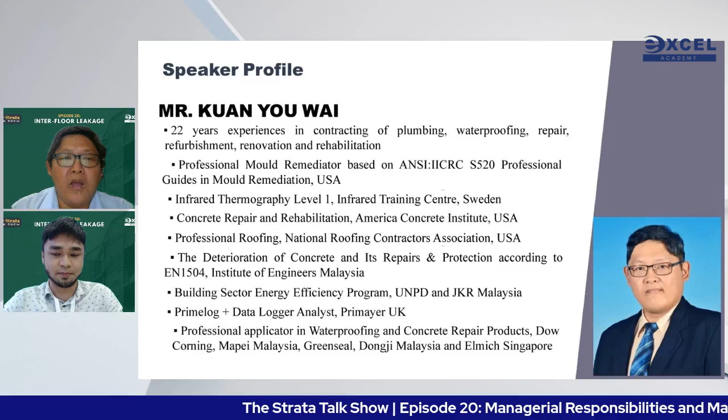Originally I'm a contractor who repairs buildings, and most of the time I repair leakages. So over the years, I have accumulated sufficient knowledge and experience, doing it hands-on as well as at a campus level in my postgrad study. So along the way, I have acquired a number of credentials, and now I have also become a speaker on interfloor leakage for the tribunal and the Commissioner of Buildings. Next page.

Next, please. So when it comes to interfloor leakage, there are three laws related to interfloor leakage, namely the Housing Development (Control and Licensing) Act, the Strata Management Act, as well as the Strata Management Regulations. So next page, please.

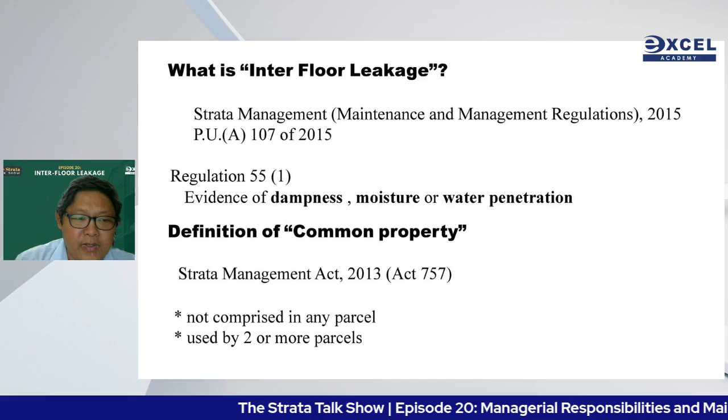Okay, when we talk about interfloor leakage, according to the Strata Management Act, it is evidence of dampness, moisture, and water penetration. But of course, the first thing that we have to consider is who pays in which type of situation. As a result, the definition of common property is very important. Common property, according to the Strata Management Act, is not inside the parcel and used by more than one parcel. But in reality, there are some areas where it clashes, so I will show you later on. Next slide, please.

Okay, this is the Strata Management Act SOP when it comes to interfloor leakage, which I have summarized in one chart. This chart is very useful because I have also highlighted the relevant sections. So in order to understand this chart, perhaps you need to print it out later and look into it in a clearer way. Firstly, upon receipt of a complaint, in 7 days or as far as practicable, the property manager needs to go down and do an inspection. During the inspection, there are 4 things that need to be considered.

Firstly, is the building element shared by more than one unit? Secondly, is it in the parcel or not inside the parcel? Thirdly, did it actually happen during the defect liability period? If it happened during the defect liability period, then the case will eventually be referred to the developer. That's how the Housing Development Act comes into this.

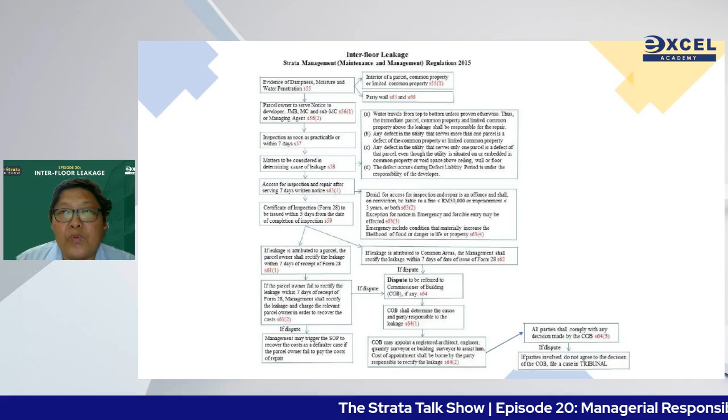Subsequently, upon inspection, if there is a need to access the upper unit or the neighboring unit, then the property manager needs to serve a 7 days notice so that he can have access. After the notice, the house owner needs to give access, failing which they will be subject to a penalty of a fine of not more than 50,000, or 3 years imprisonment. So far, the law has not been implemented for this part because it is putting people into jail for a small issue of leakages. And then if there is any further dispute, one can refer to the COB.

And in the event that the parcel owner for some reason cannot afford to do it, or has a lot of other reasons, the management will have to take up the repair work and charge it back to the account of the particular parcel.

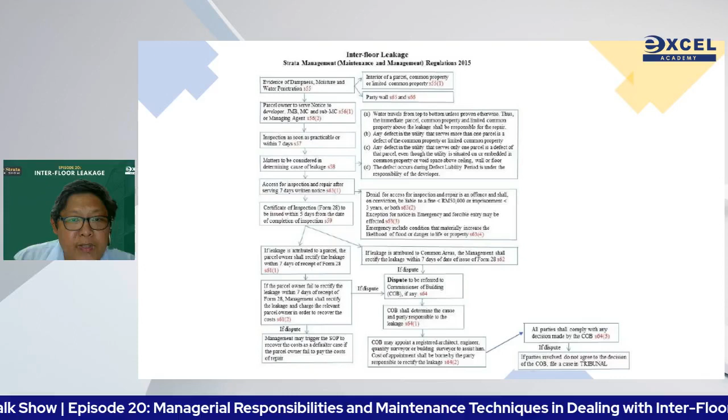Okay, so if there is still a dispute, when the COB intervenes, the COB can appoint a surveyor, architect, or engineer to carry out the inspection, and the fee involved will be borne by the party who is responsible to rectify the defect. So after all the inspection, in 5 days, the building manager needs to issue Form 28. Form 28 will state who is the party responsible for the repair, as well as the reason.

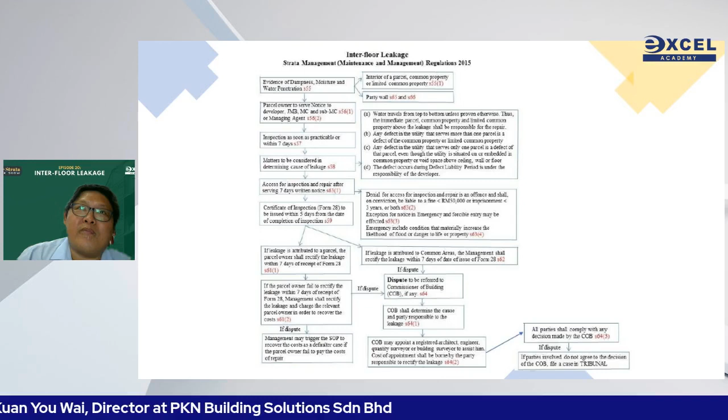But I always advise property managers, if you don't have any knowledge and tools in leak detection, try to write a general description, because there were some incidents whereby COB called me up and asked, "Hey, Kuan, some property manager filled in the form wrongly, and people have worked on it. So what happened next?" So my answer is, well, property managers have to take responsibility for their own words.

So try to put a general description. If you see slab leaking, just write slab leaking. If you see pipe leaking, just write pipe leaking. So don't go to waterproofing leaking or whichever part of the building, okay? So next slide, please.

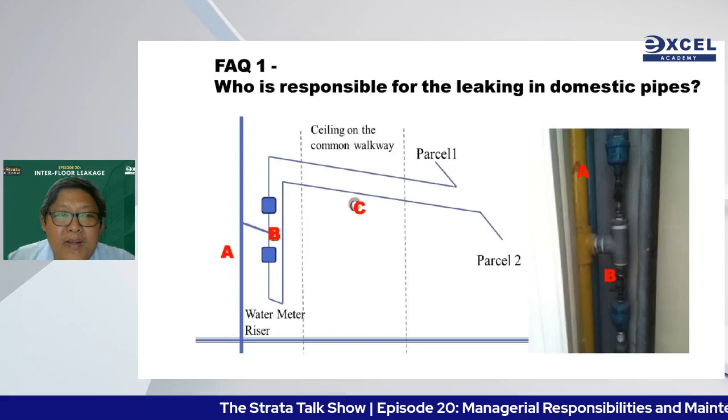And let's say C is a pipe that travels along the walkway before it enters the parcel. Let's say C leaks. C is in the common area but not shared. Bear in mind the dominating factor when we consider who pays is shared or not shared. It's not the location alone. I have encountered property managers that say, "Hey, common area, management pay." No, in fact, common area, if it's not shared, the parcel owner pays. Next slide, please.

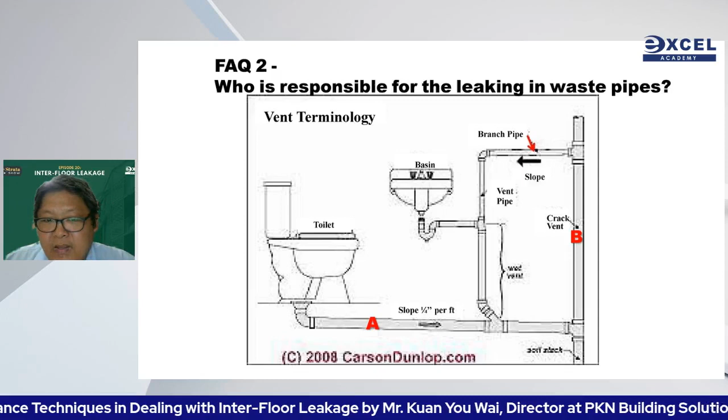Okay, this is a toilet inside the parcel. When A, the horizontal pipe, leaks, is it shared? No, it's not shared. But B, is it shared? Bear in mind, the pipe shaft, or the box-up in layman's terms, actually has many common pipes which are shared but inside the parcel. So what I want to tell you is, when it is shared, although it's inside the parcel, the management need to pay for the repair. So there is the confusion that is quite common in the industry. Okay, next slide, please.

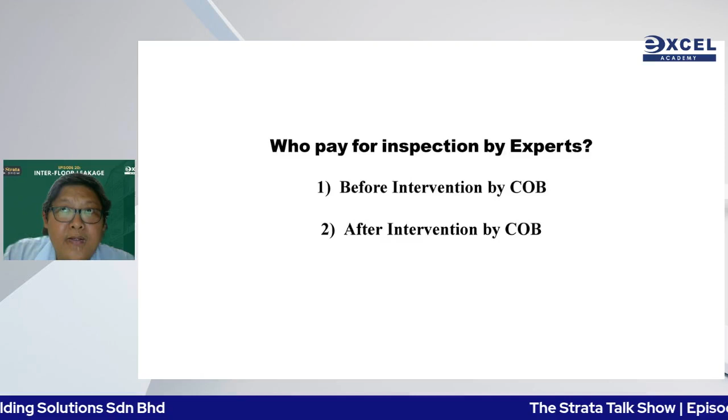According to Section 59(2)(d), any expenses incurred in the rectification of the parcel, the management have the right to recover the cost by charging to the respective account. As such, bear in mind, inspection is part of rectification. So the property manager can adopt this clause when it comes to paying the expert.

Because if you don't take the initiative to pay the expert, hoping that eventually the respective house owner will pay, for people like me who do leak detection, if my report does not favor the person who pays me, in most cases they will not pay. They decline to pay. If the property manager doesn't take the initiative to pay me, I will not be interested to do the job. So this is how it goes. Next page, please.

Okay, when there is an emergency, according to the Strata Management Act, it is something that happened that can endanger the safety of the residents and the building. Forcible entry is allowed, but I have joined some of the forcible entry exercises in the Ampang area. Bear in mind, if the case is not very urgent, you can actually request the COB to bring in police from KBKT to escort you in.

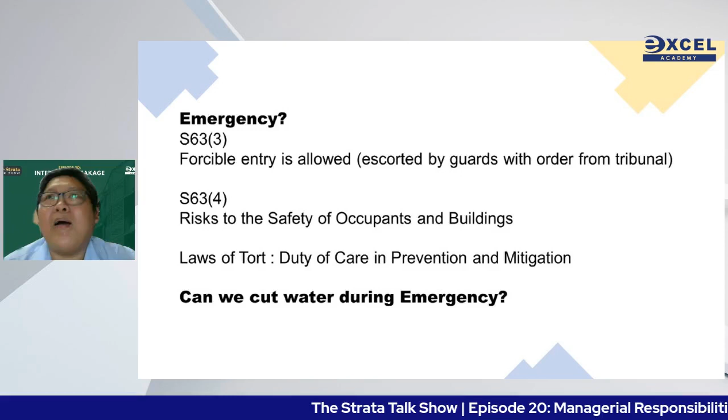If, let's say, the situation is so urgent that forcible entry is inevitable, I would always urge you to bring along your committee, your guard, your neighbor to witness the operation, so that there is no allegation later on. And then of course,

when it comes to law of torts, even though you are a neighbor, not to say if you are a manager, when you see dripping water, you actually have a duty to put a bucket under it to mitigate the damage of the leaking. And then, in the event that if I cut the water it can stop. Can I cut the water?

From a basic human rights point of view, you should not cut water. But if you need to cut water, please supply a temporary water supply so that people affected will still have access to the basic human need, which is water. So next slide, please.

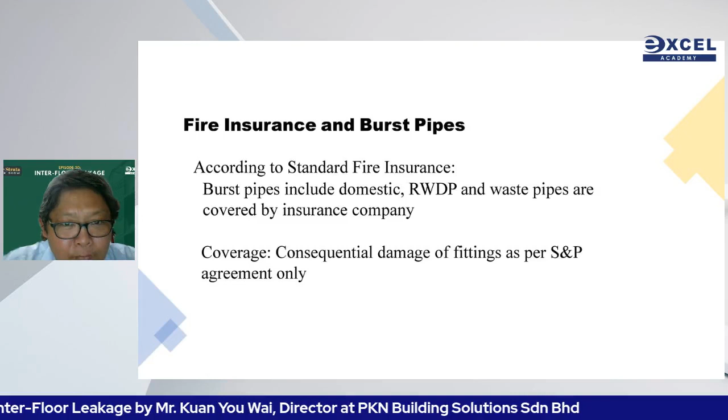In the event of a pipe burst, fire insurance in general has coverage for the damage caused by the burst pipe, be it a burst domestic pipe or burst sewerage pipe or whatever burst pipe. So long as it is a burst pipe, I understand it is covered in the fire insurance. But I will urge you to look into the insurance policy and clarify it. Next slide, please.

Okay, is interfloor leakage a concern? For your information, water is the factor that causes germs to multiply at an accelerated rate. So when there is excessive dampness, your kuman, your kulat, your virus, all will be growing in a very speedy way.

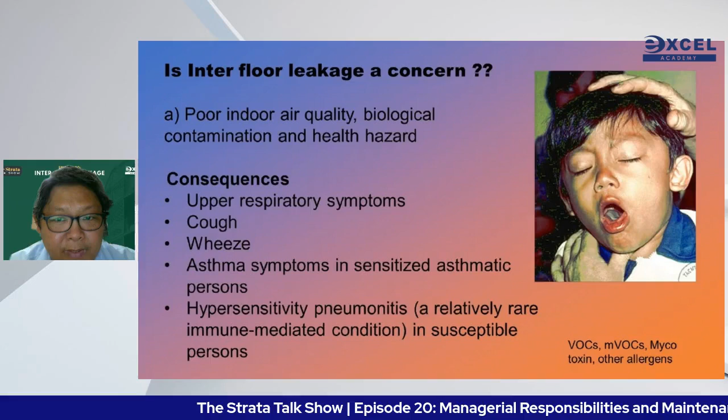As adults, we have some level of immune system, but children, the pregnant, the old, and the sick have less immune system. So as a result, any excessive dampness, even without visible mold, is unhygienic to people with compromised immune systems. So next page, please. Next slide, please. So this is mold.

Mold actually is a microscopic plant. It has roots, it has a trunk, it has seeds, and water is the variable condition that can cause it to grow. Oxygen, nutrients, and temperature are readily available. We cannot control them. Only water we can control. Next slide, please.

Okay, why, during the leaking situation at the damp spot, do we only see the circular, sometimes colorful, most of the time black, circular stain that looks like it's growing in time? So why do we see mold and not bacteria? In fact they come together, okay?

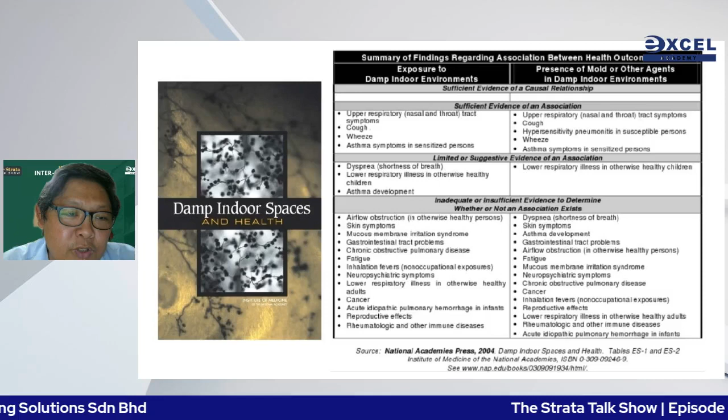It's simply because bacteria and viruses are much smaller. Even dust mites are much smaller than the mold. That's why we see mold, but in fact they come together in a battalion of biological contaminants. Next slide, please. So this is a report from the Institute of Medicine USA to tell you scientifically that yes, mold is hazardous. It's a health hazard. Next slide, please.

And besides mold, of course, building excessive dampness can cause a lot of damage to the building. Materials like timber, like cement, like concrete will expand when wet. And other materials, like steel, like other metals, will start to rust. And when it rusts, it will also expand and start to lose the structural integrity of the particular metal. Okay. So next slide, please.

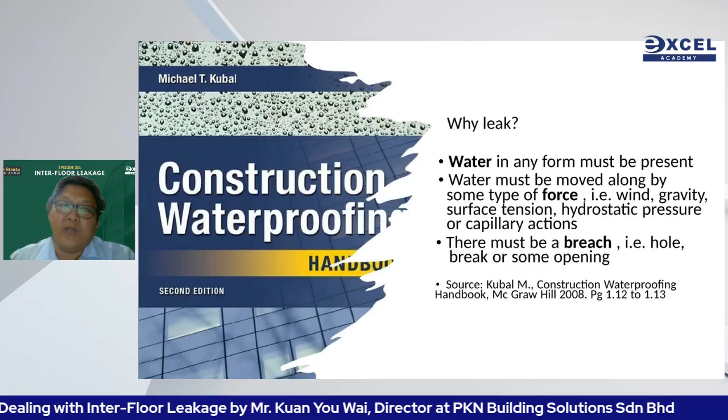Why is there leakage? According to this kitab semua bocor, the so-called kitab semua bocor, the construction waterproofing handbook, why is there a leak? There must be water, there must be a force, and there must be a cavity or breach to allow the water to go through. Next slide, please. This is very true for liquid water ingress.

For condensation, we need to understand condensation from the building science point of view of airflow, heat flow, and moisture flow. These are all basic elements or basic principles of physics, which are applicable when it comes to analysis of condensation. Next slide.

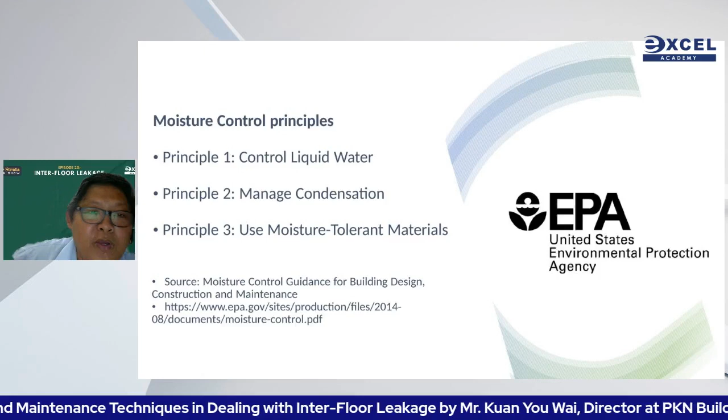The Environmental Protection Agency also has their moisture control principles. So control liquid water, control condensation, and in areas prone to dampness, do not use materials like timber, like fabric, like carpet. In these types of material, mold can start to grow easily or they start to dilapidate easily. Next slide, please.

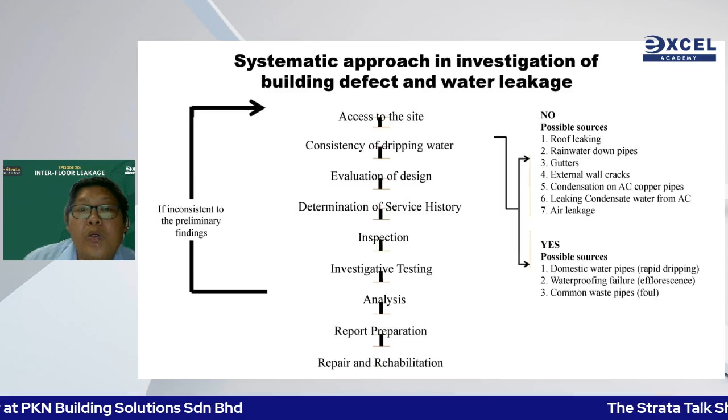For leaking that is continuous, then there could most likely be domestic water pipe leaking or waterproofing failure or waste pipe. It depends on the smell as well. And then we need to interview the parcel owner. We need to check with the service crew or the technician, and then we do inspection, and if possible, we do some investigative testing to have a more holistic and accurate understanding of the cause of leaking. Then we need to do the report and the rectification. Next slide, please.

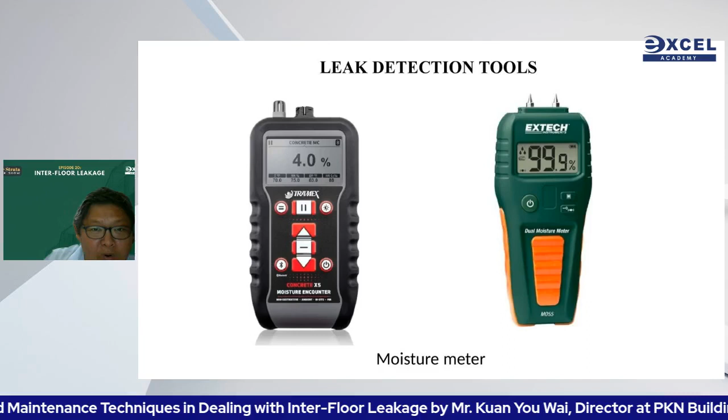So this is some of the equipment that we use to detect moisture, something like a moisture meter. For this moisture meter, there are two major types. The first type uses ultrasound. The second type uses an anode and cathode. Look at the pin of the moisture meter. One side is anode, one side is cathode. So when you put the pin onto the surface, if there is any water, then electricity will be conducted. That's how we measure water with electricity. If there is any water, more electricity is conducted. So it all comes to the principle of resistance as well as electric flow. Next slide, please.

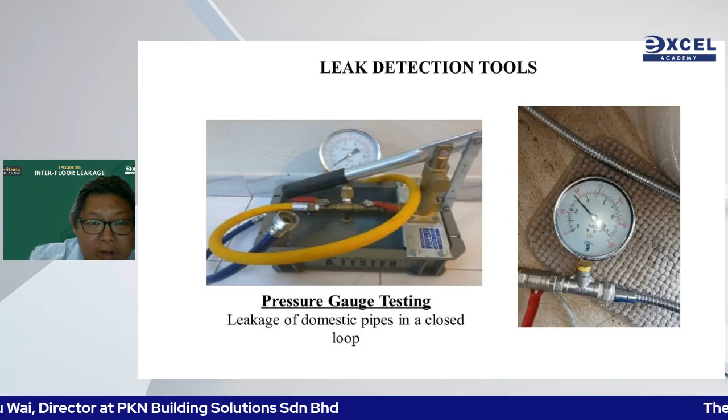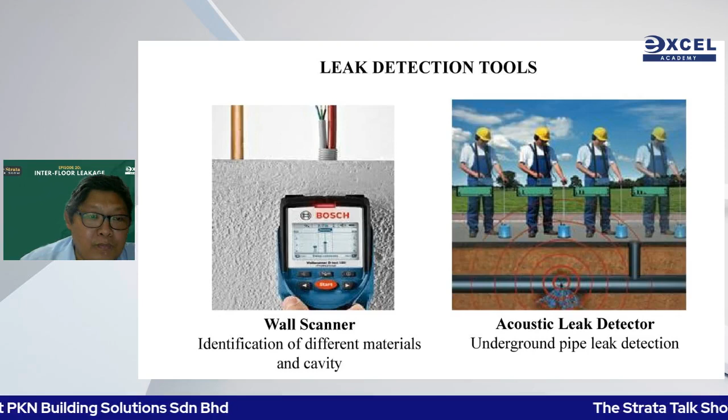Wall scanner is an ultrasound equipment that can tell me what is inside the wall or concrete. It can be plastic, it can be wood, it can be metal, ferrous metal, non-ferrous metal. So it's quite useful. And let's say for underground, how do you detect underground? Doctors use a stethoscope. We also use a stethoscope, but our stethoscope is as big as my head. So we can listen to the ground up to 10 feet deep using the stethoscope. I will show you more diagrams later on. Next slide, please.

So just now we talked about moisture meters. What if we have a very big moisture meter with very big pins? Bear in mind, most of our waterproofing materials are insulated. They don't conduct electricity. So if we spray water on our waterproofing area, and we use these two probes to touch the waterproofing and walk along, if there is any earthing, there will be a beep sound, and you can be alerted that the cavity is actually there. That is for the low voltage electronic leak detector. For the high voltage one, you can see the spark jumping into the cavities. This is how leak detection technology works in developed countries. So far as I know, this technology hasn't reached Malaysia, but I also don't encourage having it because it's too expensive. Next slide, please.

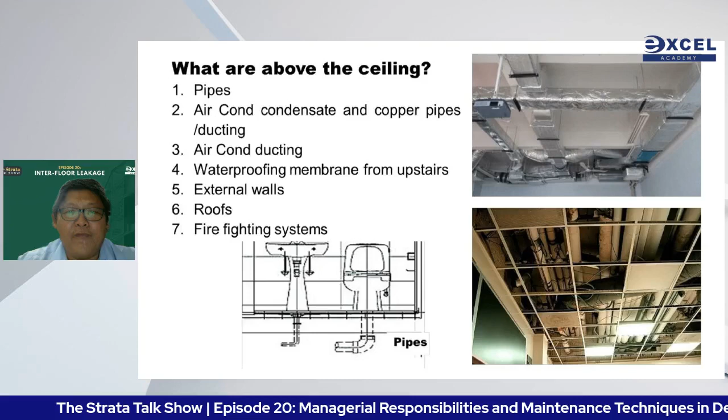Okay, when you open the ceiling, you'll be having a nightmare. There are so many possible water sources, be it pipe, be it aircon, be it waterproofing, external wall, roof, even firefighting pipes contain a lot of water. Next slide, please.

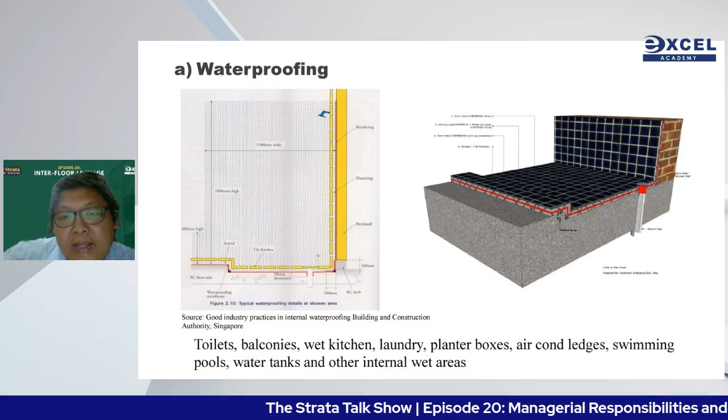So next slide, please. When there is leakage, how do we know, how can we confirm it? Firstly, this is an actual site of mine in a balcony. So I block the balcony with newspaper covered by the black garbage plastic bag, and I measure the moisture level at the lower floor with water stain before the flood test.

According to ASTM D5957, the flood test needs to be conducted for a minimum of 24 hours with less than 4 inches of water, and regular monitoring is required. Why is regular monitoring required? Let me share my experience with you. There was an incident whereby my flood test was too successful, and the water soaked into the plaster ceiling. The whole toilet plaster ceiling collapsed, causing more damage.

In another case, the water went into the DB box downstairs. Luckily, no electrocution. Otherwise, I will not be speaking here. You will not know me. So these are all the risks, inherent risks of conducting flood tests, which you need to be aware of.

So when you do flood tests, if you cannot be there, make sure the house owners are there and tell them, if the water recedes, please help me to fill in water. If you can see a lot of water coming down, can you quickly call me up and I can come here to verify. If there is an obvious increase in dampness using the moisture meter, you can stop the flood test. You do not need to wait till the secondary damage arrives. Next slide, please.

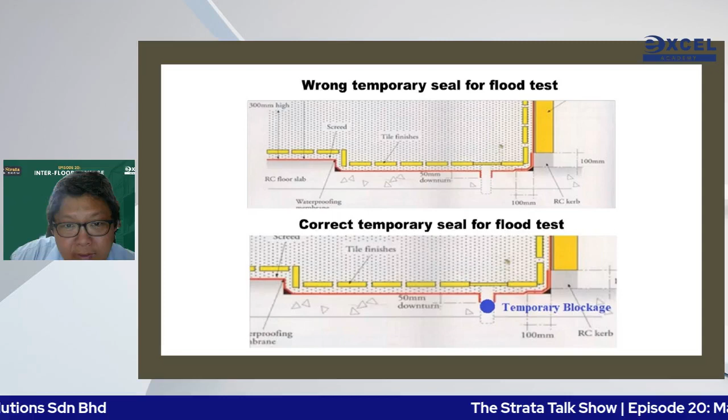Next slide, please. So this is how we seal the floor trap for the purpose of flood testing. You see a number of people use transparency to cover the floor trap. Usually this is not correct, because if you look at the diagram, we should actually block it inside the floor trap the way that I show. So next slide, please.

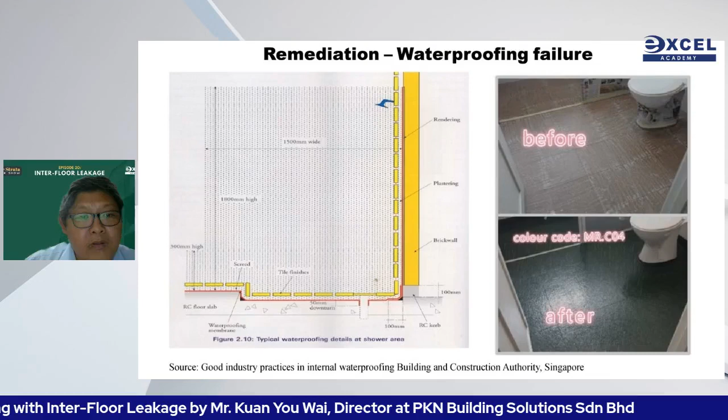There are some methods nowadays that apply epoxy coating on the toilet. It's quite a cost-effective manner, but it's not a durable one because good waterproofing should be elastic and chemical resistant. Epoxy lacks the elasticity, although it's very chemical resistant. Our building actually expands and moves. So when there is no elasticity, it cracks easily, then water will start to penetrate again. Next slide, please.

And PU grouting is very debatable, right? Everyone knows that it's no good, but everyone is doing it simply because it's the cheapest way. Being an infrared inspector, I use infrared to monitor PU grouting. And from the infrared point of view, the dampness actually spreads. So when it spreads until it reaches the next cavity, water starts to leak again. That's why waterproofing warranty carries 1 month to 3 months warranty only.

Simply because it's not a way to resolve the root cause. Unless you can prove that the crack is no longer moving, no longer dynamic, and the source has been rectified, then you should seal up the cavity with PU grouting. Next slide, please. Pipe. All types of pipe: waste pipe, domestic pipe, AWM pipe, common waste pipe, rainwater down pipe. Next slide.

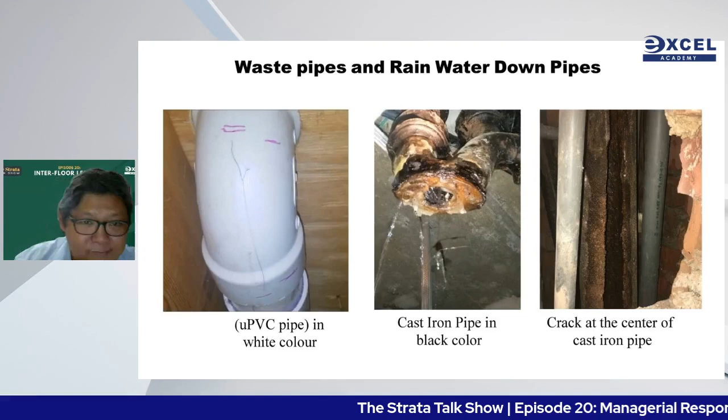Okay, so we talk about waste pipe for the time being. Waste pipe typically cracks, especially at the elbow due to impact. It's thinner as compared to the cast iron pipe next to it. But cast iron pipe, after its service lifespan, has a tendency to crack by itself due to corrosion. And the third photo is actually a vertical crack from top to bottom of a cast iron pipe.

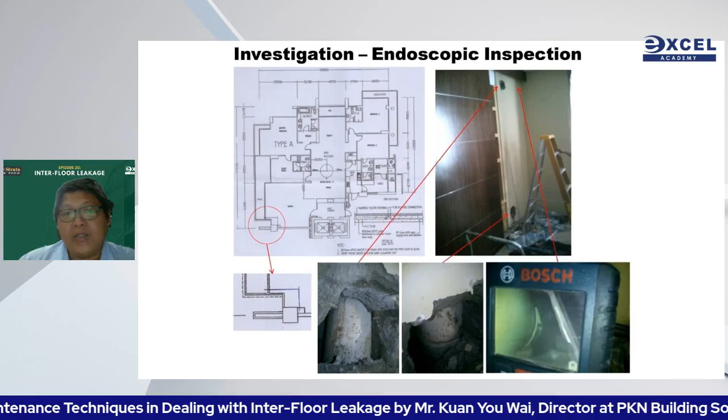And in one of the cases, I actually needed an endoscope to check it because the leaking is right behind the box up. So without an endoscope, I really cannot find it, or I will have much more difficulty to find it. This is a real life case that I attended back in the KLCC enclave area. Next slide.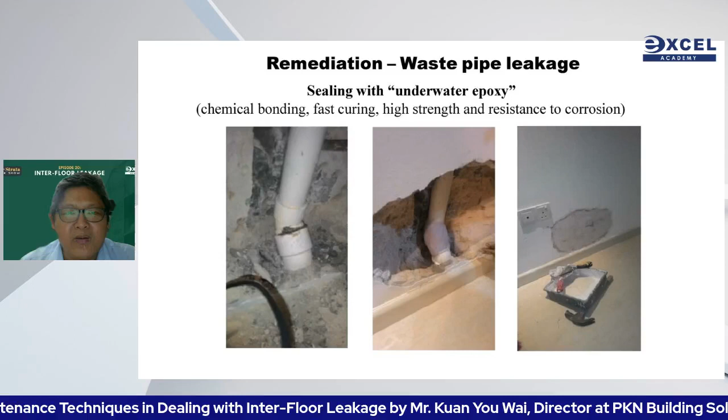And I discovered underwater epoxy comes in different grades. The very good grade really works perfectly, because epoxy etches into whatever surface it has contact with. It etches and it holds, and it becomes as hard as stone. So far, all these jobs have had no complaints until today. I've been in the industry for more than 22 years, and this really works. Okay, for cracked pipe that doesn't have pressure, this is quite a useful method. Next slide, please.

So when there is a blocked pipe, besides the rotan, these are the three ways that you can clear the blockage easily. One of them is the kinetic water ram that harnesses water and air pressure. We pump the air from this black handle at the back, beside the trigger. We keep on pumping air until the air pressure becomes very high, and once we trigger, it can travel into any shape and any distance. It goes so fast. The small pipe, horizontal, vertical, the floor trap, it doesn't reduce the pressure.

And secondly, high pressure water jetting. Look at this clearly. One point shoots to the front and three points shoot to the back. It actually moves into the pipe because three points shoot to the back diagonally. It doesn't damage the plastic pipe, and it will bring the hose into the drain by itself, because it pushes to the back.

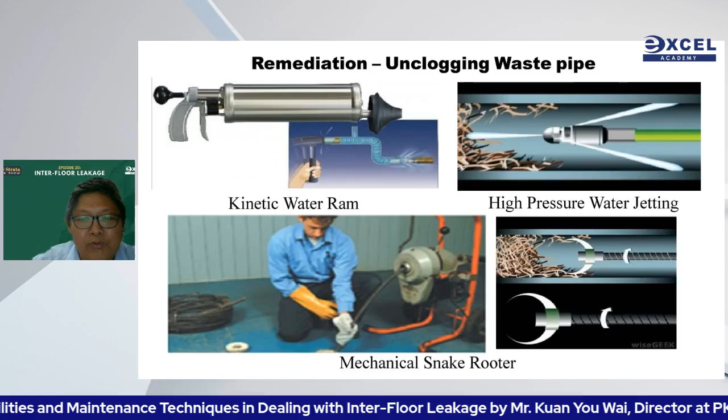And thirdly, the mechanical snake rooter. This type of motorized rotan, when you install different adapters or heads at the front, can break stone, and can clear leaves or roots. So it's also quite a powerful method to clear pipes easily. Next slide, please.

Another situation in our pump room: without leaking, there's extensive corrosion, and soon pitting corrosion will happen and it will start to leak. This is simply because of poor ventilation and the dense, thick chlorine gas. Look at this stainless steel tank. A stainless steel tank without paint is the first place water will condense at night. So when water encounters chlorine gas, it becomes hydrochloric acid and starts to damage metal and concrete. Bear in mind, hydrochloric acid can even corrode gold.

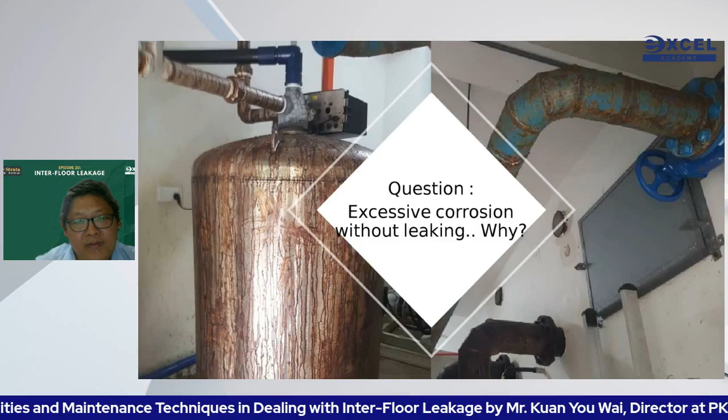So this is something one needs to be aware of when you install stainless steel pipes or fittings into the tank or pump room, because chlorine gas is not only hazardous to humans, but also hazardous to metal. Okay, next slide, please. Next slide, please. Okay, PVC pipe, domestic pipe, burst. Why did it burst? Next slide.

Okay, Suruhanjaya Perkhidmatan Air Negara has a recommendation. Residential units, high-rise residential units, should have water pressure above 10 meter head and less than 30 meter head. If the pressure is too high, a pressure reducing valve should be employed. This is extracted from the Uniform Technical Guide of Water Reticulation and Plumbing, published by SPAN, which you can download from the internet. If not mistaken, this is page 59.

So what I want to show you is the pressure reducing valve. It should be serviced in due time, twice a year as recommended by some manufacturers, three times by others. So check with your manufacturer how often it should be serviced. If you don't service it, the mechanism inside will go haywire. Sometimes the water pressure can become very high, sometimes it can drop drastically. The diaphragm of the pressure reducing valve needs to be replaced every 4 to 5 years, subject to the respective manufacturer. Next slide, please.

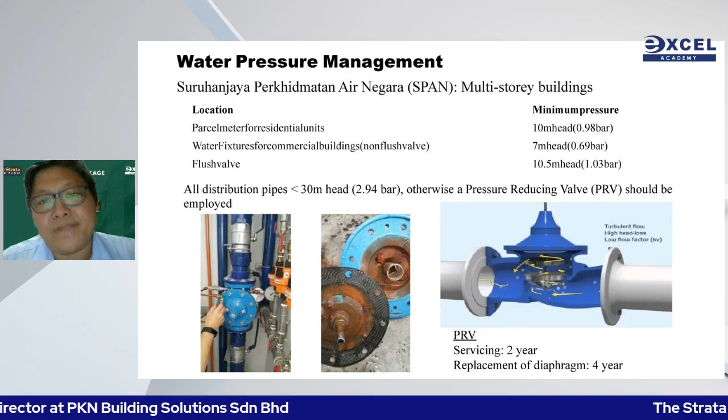And the industry has been practicing wrongly, because they like to set the pressure reducing valve to 2 bar. So bear in mind, every drop of each story, there will be an increase of water pressure by 0.3 bar. That's why in the first 3 highest floors, where the water pressure is not enough, we need a pump. Okay, after the first 3 floors, then you go by gravity.

And you can see 10 meter head is 0.98 bar, 30 meter head is 2.94 bar. So we put it to the closest decimal. 1.2 bar is safe, 2.7 bar is also safe. Okay, but if you set it at 2 bar at the 5th floor, the ground floor will suffer from high water pressure.

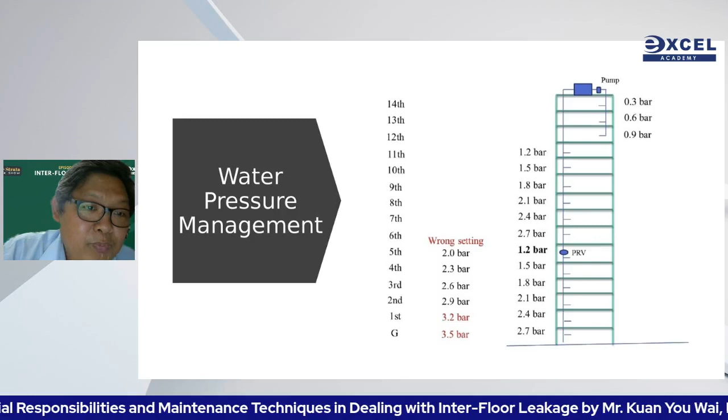I would like to share with you there was a year in 2019 where all the presidents and I, as a president, came to a conclusion unanimously to say that in the event someone goes into the unit and discovers the water pressure is more than 3 bar, any burst pipe will be managed and maintained by management, if management doesn't supply water with safe water pressure and the pipe bursts.

And I want to share with you: water heaters, faucets, all other toiletry utilities are designed to work at 3 bar or less. Imagine if a water heater bursts, the water may go into the wires and it can cause electrocution as well. So this is not something that you should take lightly. Water pressure management. Next slide, please.

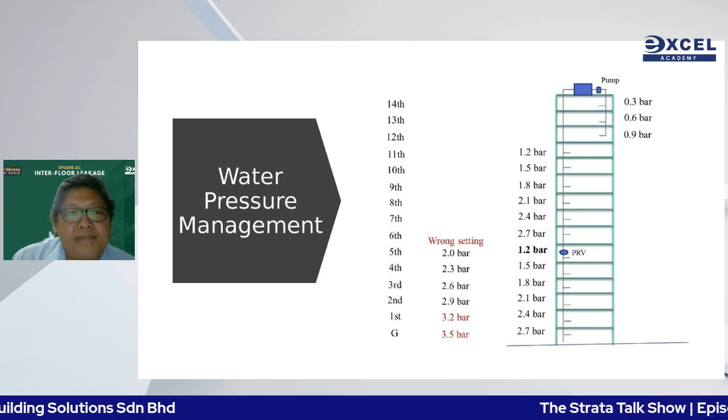And KPKT recommends cuci tangki setiap tahun, washing the tank every year. So can I know how many of you have had your water tank ever washed? If the water is so bad, it's detrimental to your PRV. Okay, so next slide, please.

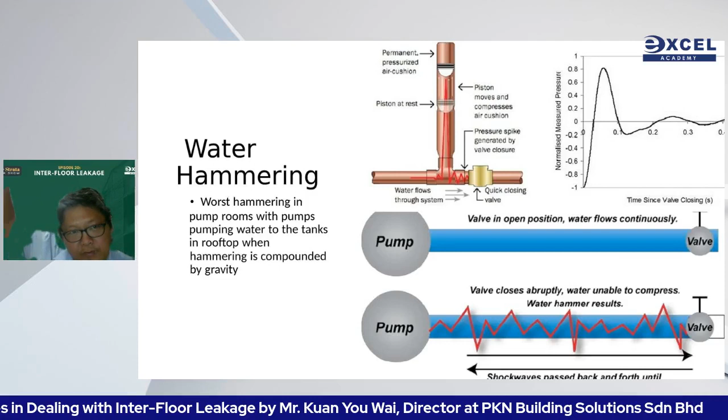So when you can hear water hammering sound, especially inside the pump room where from the ground floor you pump to the higher floor water tank. When the pump stops, water will push back due to gravity, it will bang the pipe and cause a lot of hammering. The hammering can be as heavy as 600 pounds, like a big hammer banging into your pipe, waiting for time to burst.

So when you have hammering, you do need a water hammer arrestor which has a layer of air, and when the pressure surges, the piston will move and the air will become an absorber to absorb the pressure surge. Okay, next slide, please. So, how do we check? Next slide, please.

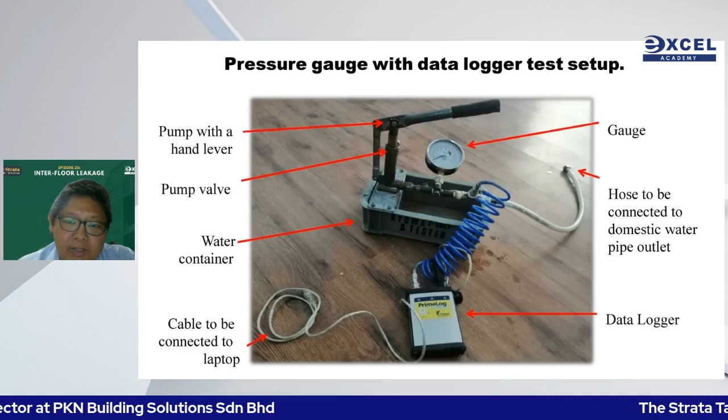This is the pressure gauge testing equipment that is meant for litigation purposes. We actually bring in a laptop, connect it to the data logger to plot the water pressure throughout 1 hour to see if there's any drop in pressure. Okay, this is the setting of pressure gauge testing for litigation purposes. Next slide. So I would like to share with you what I have done at the actual site.

Okay, this is the typical configuration of domestic pipe. Let's say it only has a toilet. In this toilet, there are 2 valves, 1 valve for cold water, 1 valve for hot water. So if I connect my pressure gauge to point A1 and close A2, A3, and then I also close valve A, when I pressurize, pump in water from my water container with the hand pump from point A1, the pressure will rise because it's a closed loop.

So when the pressure rises, let's say 1 bar, 2 bar, and I shut down my pressure gauge testing kit, it will become a closed loop. If there is no leakage, the pressure will not drop. If there is a drop in water pressure from the pressure gauge testing kit that I can observe, then there must be some leakage in this zone comprising A1 to A3.

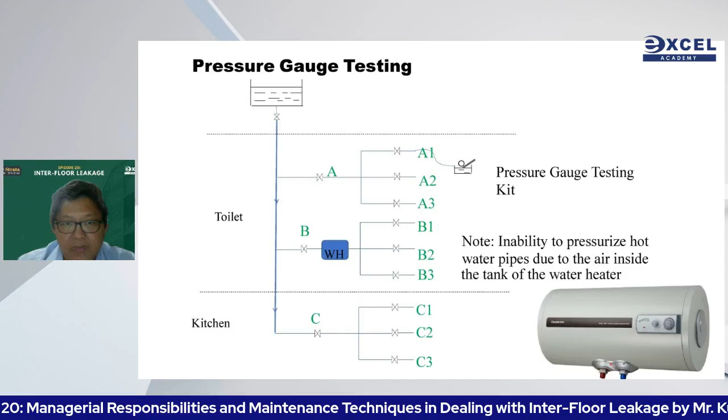Okay, this is the actual site. My pressure gauge testing kit, I connected at 12:11 p.m., 2 bar. In 1 minute, it dropped by 0.7 bar, confirming that there is a leakage in the concealed pipe. When you do all this, all the faucets must be closed tightly, okay? And then you need to check your pressure gauge, is it leaking, which is visible, you must check.

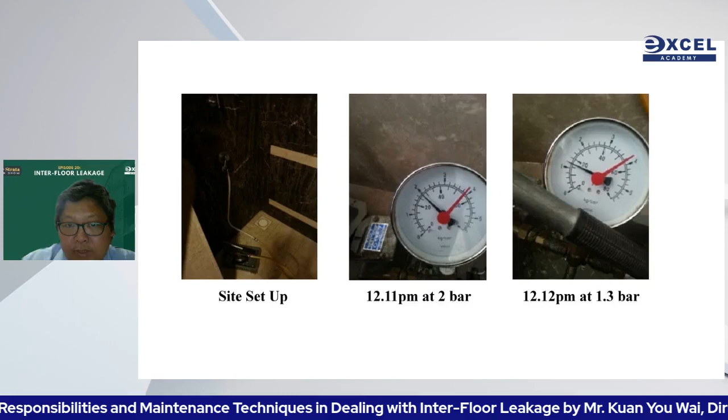Make sure there's no leakage. From experience, we actually need to release the pressure. Let's say after we confirm there is leakage, we need to pressurize the pump again up to 2 bar. Okay, sorry, I rephrase. Let's say if there is no leaking, there are two possibilities. First possibility is, there really is no leaking. Second possibility is the valve that controls the incoming water pipe actually leaks. Whatever leaks out from the pipe is replenished from the main pipe.

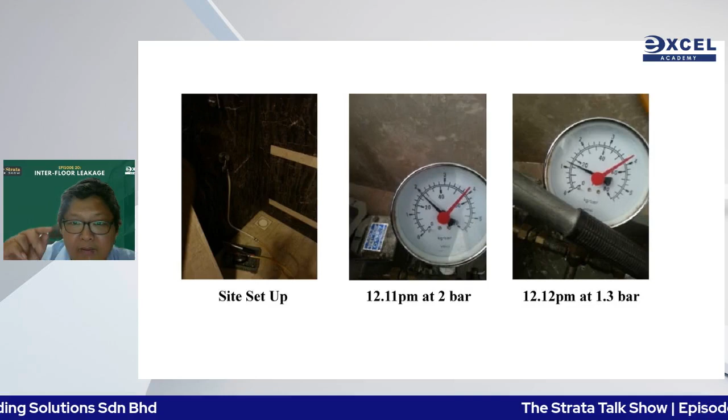So when we reduce the water pressure to 1 bar, okay, let's say original 2 bar, right? So no leakage. So in the event that there is no drop of water pressure, we need to release a bit of water to bring down the pressure to 1 bar, and wait for a while to see if it returns to 2 bar. If it returns to 2 bar, it means that the water that leaked out has been replenished back due to the faulty stopcock from the main water supply. Okay, next slide, please.

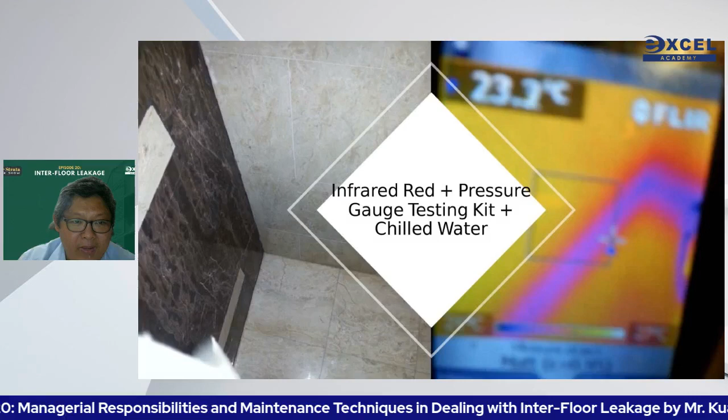So the issue is, we know this zone is leaking. Where is the leak? Imagine if we can fill ice water in the water container that I showed just now, and we pump ice water into the pipe. Bear in mind, the pipe is very close to the surface. If we can pump ice water into the pipe and cool down the pipe, we can use infrared to see where the pipe is leaking. And you can see from this picture, the pipe is actually traveling at the corner and bends 90 degrees to the other side. Okay. Next slide, please.

I'm sorry, the raining sound is too much.

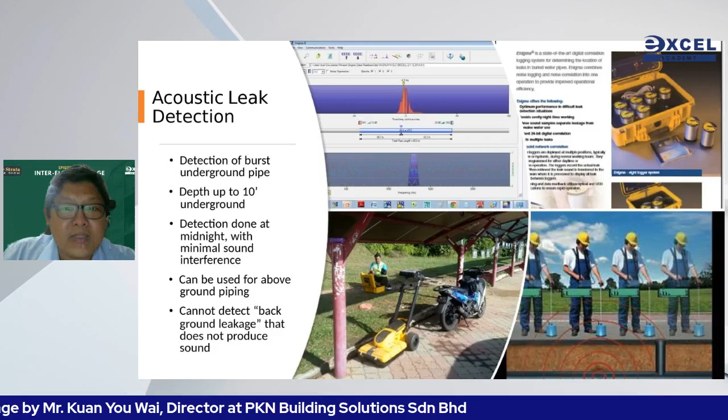So, okay, let's say a huge estate. How many acres? Suddenly your bill of 1,000 jumps to 3,000. Next month 5,000. Somewhere is leaking, but in the whole estate, how to find it? There is a technology to find it, okay? Firstly, we use a ground penetrating radar to detect all the locations of the underground pipe. After that, we put sound loggers into different chambers.

When we start to trigger the water burst sound by resuming the water supply, from the difference in timing of the burst sound traveling to the logger on the left and to the logger on the right, we can estimate where the burst underground pipe is. And from there, at midnight, we bring in our stethoscope type of sound detector to confirm there is a leakage at the location that the computer generated for us.

This technology is so advanced, there's no specific standard to regulate it, simply because it's too advanced. So the water authority actually employs this type of water engineer to detect their leakage along the main road for the underground pipe. So I work with a number of them to help the industry. Next slide, please.

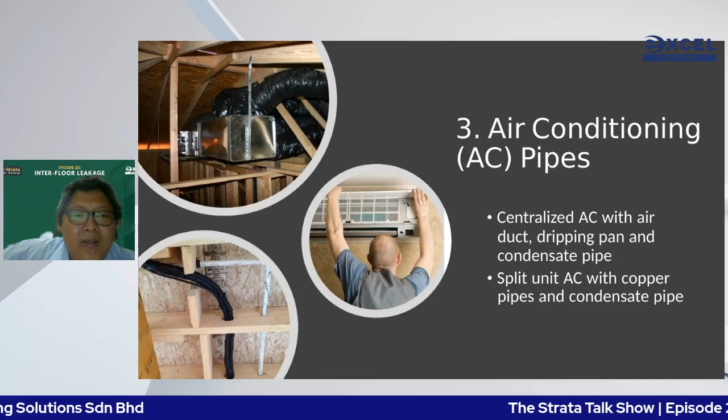Okay, condensation. Aircon pipe. The colder the area, the more likely it will condensate. Next slide. Bear in mind, the chiller type of aircon, the centralized aircon, has four functions. It dries the air, it filters the air, it cools down the air, and it needs to insert positive air pressure so that the natural fresh air, which is untreated, humid, and comes with dust, does not enter the building. But split unit aircon serves two functions. It cools down the air and it dries the air. The colder it is, the drier it must be, otherwise it will condensate.

So condensation is a factor of surface temperature as well as ambient humidity. Okay, so let's say if your copper pipe is not well insulated, then you have condensation. And in Malaysia, the amount will be very substantial. Okay, and our aircon men like to wrap the joint of the insulation, so they press out the air, which is a good insulator.

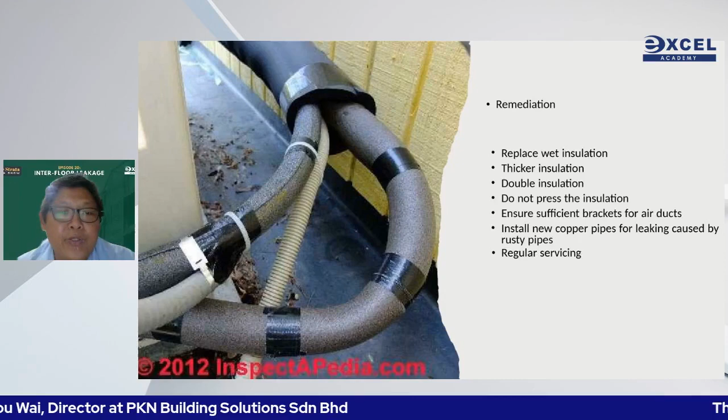Next slide, please. Now, I would like to show you how proper insulation should look like, one that doesn't press out the air. Next slide, please. In one of the server rooms, I actually have done this rectification by installing rock wool and canvas. And I make sure the canvas is airtight so that the humid air will not have a chance to touch the cold surface below the rock wool.

That's how it works. And until today, it worked perfectly well. And this is the effective way of handling condensation. Only insulation can handle it. Next slide, please.

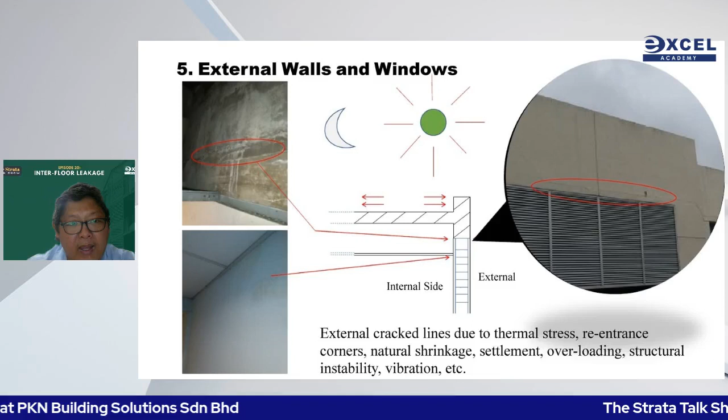And of course, external wall cracks. In Malaysia, due to the excessive heat, we always have this type of crack on the highest floor under the flat roof. We also have this type of crack at the interface of brick and metal frame, or brick and the concrete element, concrete component.

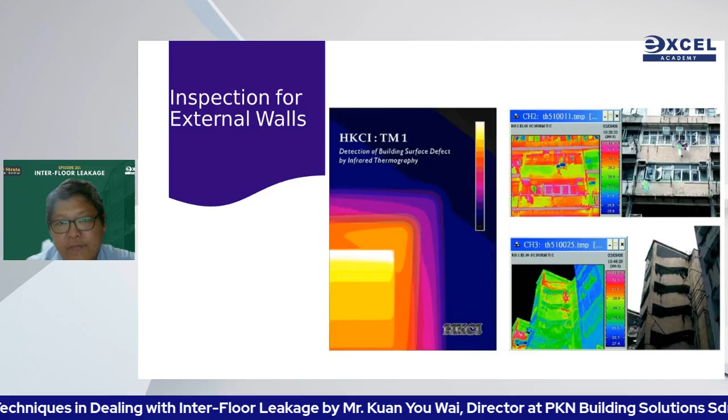Next slide, please. All this is because different building materials have different coefficients of thermal expansion. So when we assemble them in different orientations, when they expand and contract, the wall will crack very badly. So HKCI TM1 is one of the standards used, adopting the technology of infrared imaging to detect dampness and crack surfaces with infrared. It's very convenient, very efficient and very accurate as well. Next slide, please.

So now this is an actual site where I measured the temperature, and this happens very commonly in Malaysia, at the flat roof, especially if the flat roof has a protruding building like a lift motor room. This type of crack is actually dynamic. I measured the crack of a small lift motor room. It expands and contracts 0.5 mm between 8:30 and 1:30 p.m. So the crack is actually expanding, contracting, expanding, contracting.

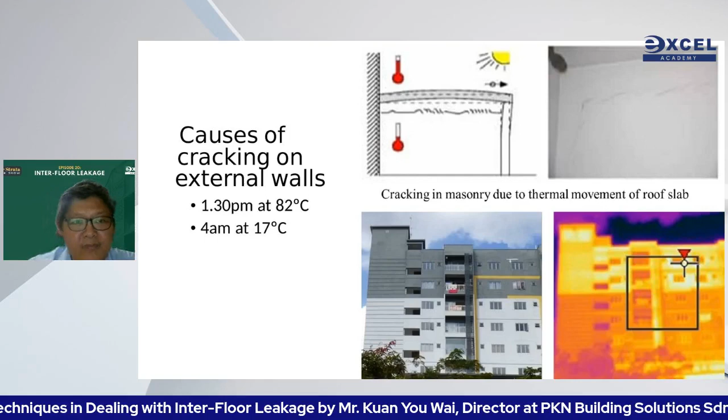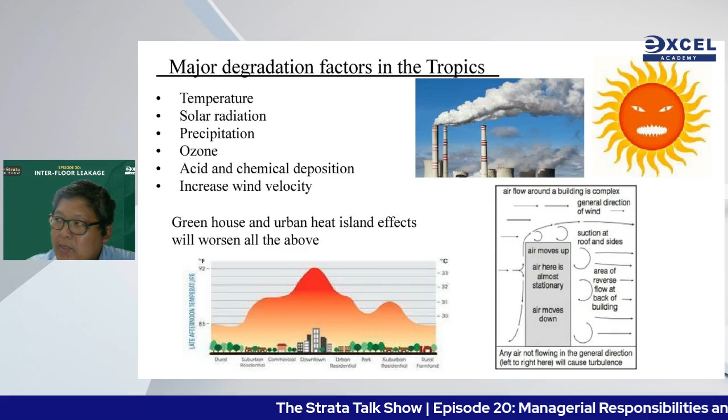And of course, roof. Roof is a major issue of leaking. We have flat roof, pitch roof, metal roof. Next slide. Due to environmental pollution and the heat wave, our building roofs are subject to a lot of accelerated deterioration. Imagine, in some places the meteorological department discovered the pH of the first few minutes of rain is actually 2. How corrosive it is. So our concrete and metal roofs can go easily in this area. Next slide.

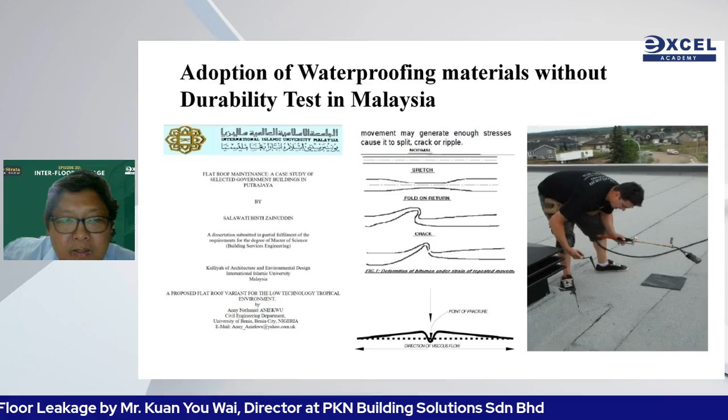Torch membrane is the most common way of rectification, but scientific papers have shown it's not suitable for the tropics, simply because bitumen by nature is not ultraviolet stable or heat stable. That's why you can see our tar roads: in the first year black, in the second and third year gray, in the fourth year white or light gray, and in the fifth year, full of potholes. Bitumen is not suitable for the tropics. In developed countries where cold days outnumber hot days, it's okay. Next slide, please.

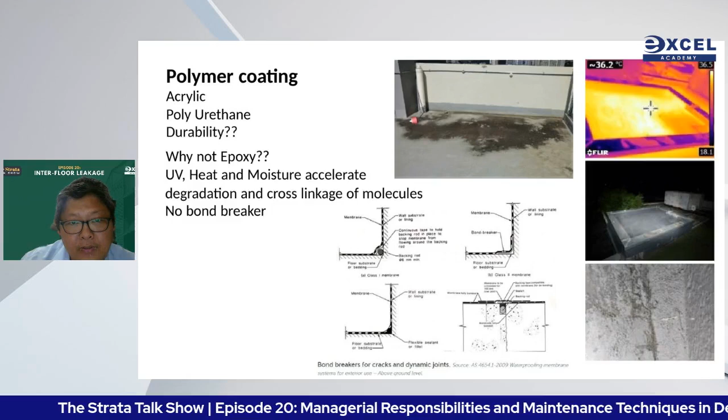So a lot of coating systems are also not suitable. And we also use infrared imaging to detect water pockets. I will explain to you in further detail shortly. And for the coating type, we actually need a bond breaker for areas that are prone to cracking and movement. Okay, next slide, please.

And this is one of the sites where I use infrared imaging. You see, compared to dry and wet concrete due to waterproofing failure, on the surface there is no surface water, because the water is inside the concrete. So under the hot sun, when dry concrete and wet concrete absorb the same amount of heat, in the evening the heat will dissipate faster in the dry concrete area, but the concrete area with a water pocket underneath the surface becomes hotter, simply because water can retain heat longer compared to dry concrete.

So at night, 8 p.m., based on ASTM C1153, we do infrared imaging to detect the water pocket and confirm it with this capacitance type of moisture meter that can penetrate up to 20 mm from the surface to confirm the presence of the water pocket. So this is a scientific way of identifying leakage. And in this case, the leakage is due to a cavity. We found poor workmanship and poor termination at the piping penetration. Okay, next slide, please.

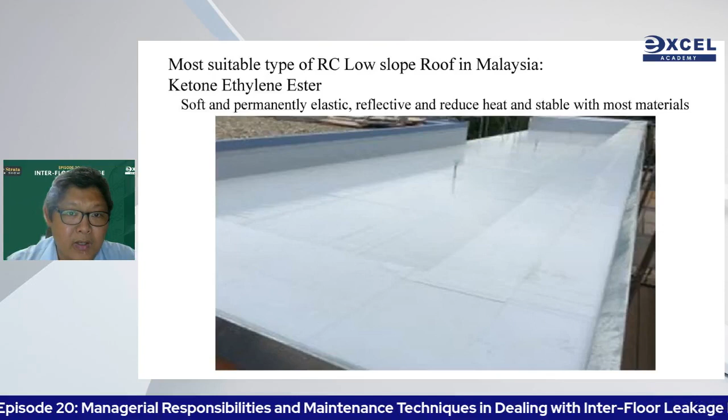And so far from my own research, I discovered ketone ethylene ester is by far the best and most suitable type of waterproofing material in Malaysia because it reflects the heat, it cools down the surface by 10 degrees Celsius, and it is permanently elastic. And elasticity is very important when it comes to our roof because of the excessive heat.

In University Malaya, a group of students and we did an experiment on a small concrete roof on the University Malaya campus. We discovered at 1:30 p.m. the temperature was 82 degrees Celsius on average. 82 degrees Celsius, okay? At 4 a.m., it was 17 degrees Celsius. So the difference from daytime to nighttime is 65 degrees. If you multiply it with the coefficient of thermal expansion, it actually expands and contracts. Next slide, please. That makes elasticity so important.

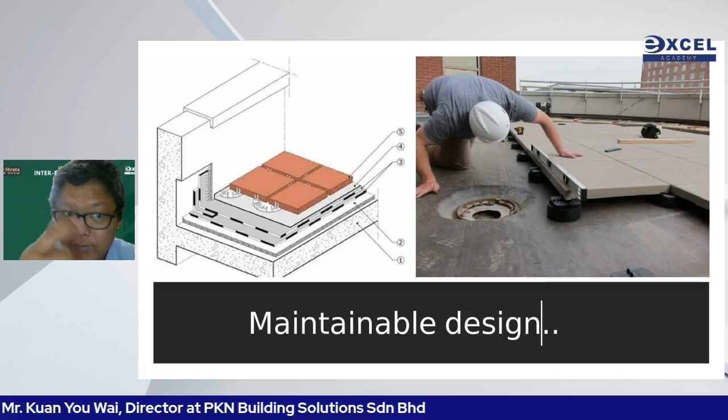And if you need to refurbish your slab, try to make it a maintainable design like this, where in future you can easily dismantle the movable slab, check what is happening inside, and re-waterproof it easily with just the bituminous type of waterproofing. You see, the air gap allows ventilation. The thick concrete slab is an insulator against the heat, and the bright reflective color reflects the heat and solar energy. So try to make it a more maintainable design for the future, then you can bring down the life cycle cost. So next slide, please.

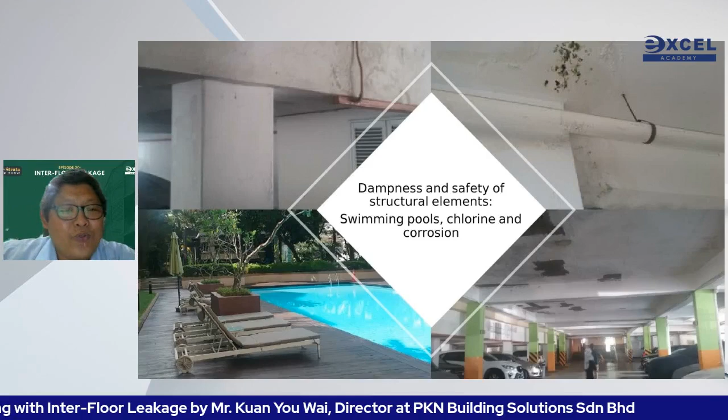And in a swimming pool, a flat roof is very bad, because do you know why you need to replenish the chlorine algae control agent every 2 days? Where has the chlorine gone? Chlorine in the swimming pool is volatile. Under the hot sun, it will evaporate. In 2 days' time, it's gone. And it is 2.5 times heavier than air, so it always floats on the concrete deck. So when it encounters water, it becomes hydrochloric acid and attacks the reinforcement steel bar, your waterproofing and your concrete. So that's why for waterproofing in a swimming pool, if it's not chemical resistant, it's disastrous.

Okay, next slide. And it can cause damage to concrete, so badly like this, and this could be a structural issue, okay? But unfortunately, most of our structural engineers are not aware of corrosion engineering. Some of them don't even see corrosion as a risk, you see. Very sad to say, but this is known under EN 1504, which I will explain to you in the next slide. Next slide, please.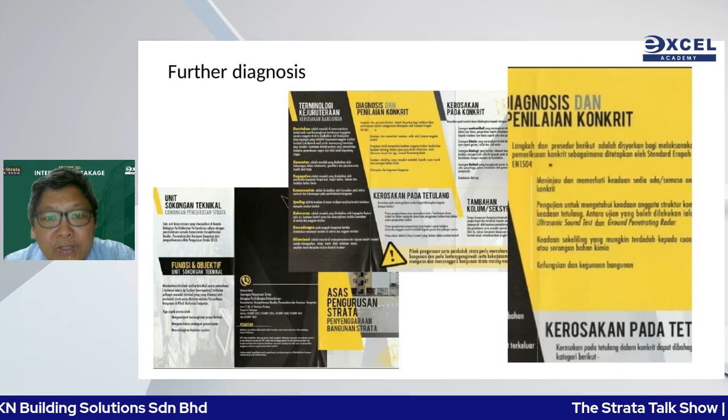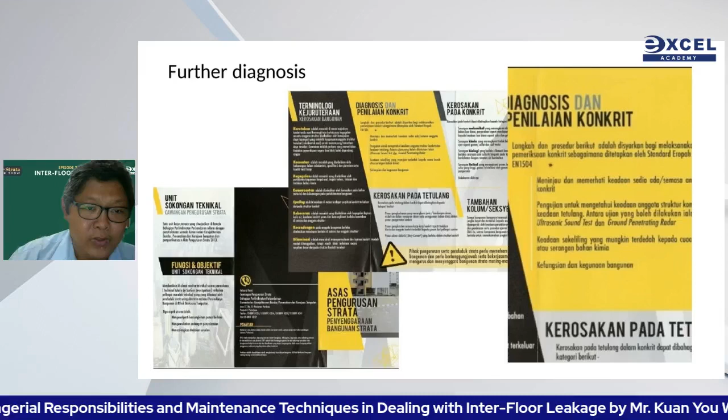Okay, KPKT recommends, in the event of diagnosis and repair of concrete, to comply with EN 1504. EN 1504 is not only waterproofing, but also corrosion control. So imagine if water starts to go into the concrete, the corrosion matrix has formed, the anode and cathode sides have formed, and corrosion has started, even though you waterproof on top of the surface of the swimming pool. Once corrosion has started, the reinforcement steel bar will keep on expanding, up to 6.5 times its original size, cracking the concrete from inside. And this corrosion will continue, even though it will reduce in speed after you waterproof. So whatever you waterproof will soon crack.

And there is an exclusion in any waterproofing warranty letter. Engineering fault or crack is an exclusion clause for their warranty. So as a building manager, please do your homework to advise corrosion control as well as moisture control when it comes to re-waterproofing. Okay, next slide, please.

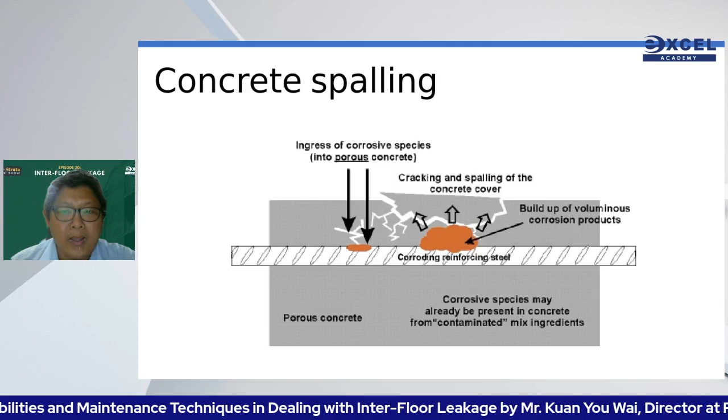So this is typically how concrete is damaged by corrosion. When the corrosion product, the rust, starts to expand, the reinforcement steel bar depletes in size, in diameter, so there is a drop in tensile strength. Cracked concrete has no compressive strength. So overall, your tensile strength and your compressive strength start to drop, and then it will cause a lot of damage. Next slide, please.

Corrosion control has a way to measure with half-cell corrosion mapping. I can do it; I'm a competent person to do it, as well as to test with rebound hammer. Because when the concrete cracks, the first thing that happens is delamination. We can actually hear a hollow sound when we knock on it. So if we discover corrosion has started, we can use the rebound hammer to check the integrity of the compressive strength. Okay, next slide, please.

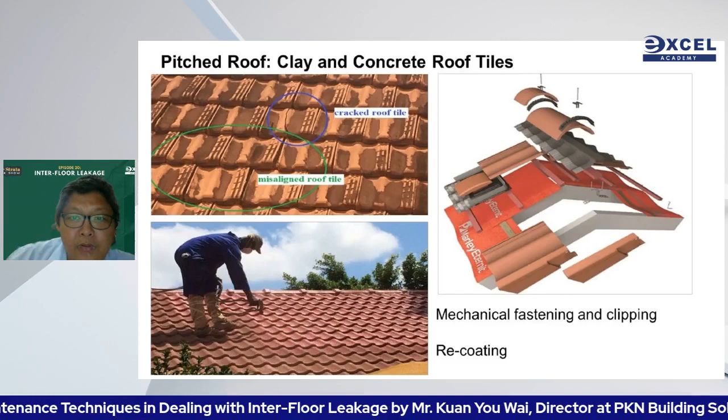And pitch roof, yeah, climate change has caused a lot of stronger wind. And if your roof is lifted by the wind, please find a way to reinforce it like the way that I show it. This is actually based on an improved British standard for roofing due to the climate change. So they have more clipping and reinforcement systems nowadays. And of course, pitch roof, clay tile or concrete tile can be repainted and refurbished to improve the porosity against rainwater ingress. So next slide, please.

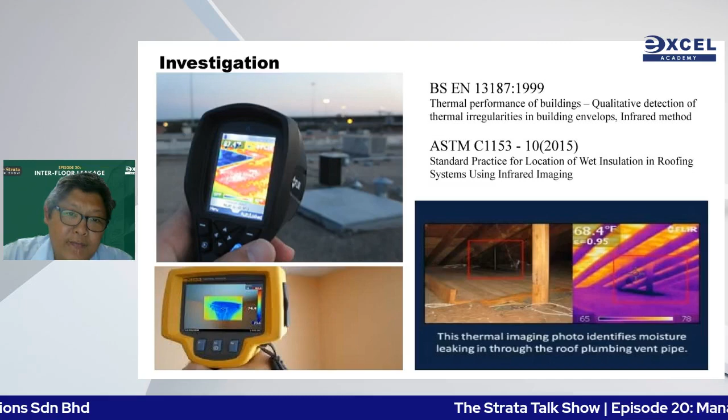Okay, on the flat roof, we check for the hotspot according to ASTM C1153-10(2015). For the indoor environment, we check cold spots because the internal area is always cold, based on BS EN 13187. Next slide.

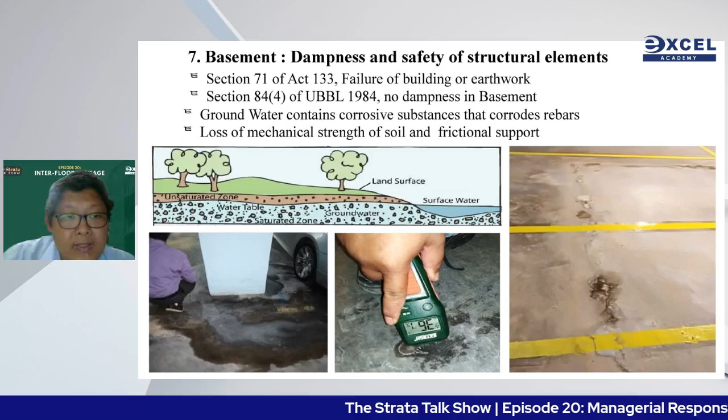And most recently, we discovered there is more rising water due to the rising water table. And Uniform Building By-Law Section 84 Sub 4 disallows any dampness in the basement simply because our building is not designed to be floating on the water. So if there is any discovery of water in your basement or your lift pit, you do need to do further study to see the pH as well as the type of pollutants inside the water sample, so we can understand the implication to the foundation. Next slide, please.

So whatever you have rectified, the place is full of germs if the dampness is there for more than 48 hours. Okay, so all this dampness, mold, virus, bacteria, even though you kill it, if you don't remove it physically, by wiping it, by using a HEPA vacuum to suck it, and mold, be it alive or dead, is equally allergenic. That's why it needs to be physically removed to return it to the original state or ecology with small quantities of mold, virus and bacteria only. Next slide, please.

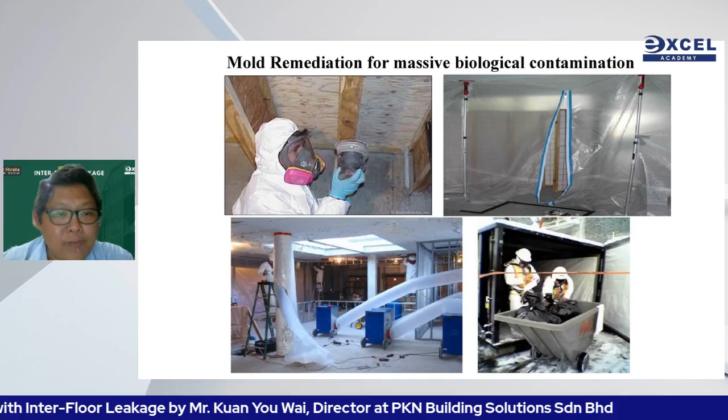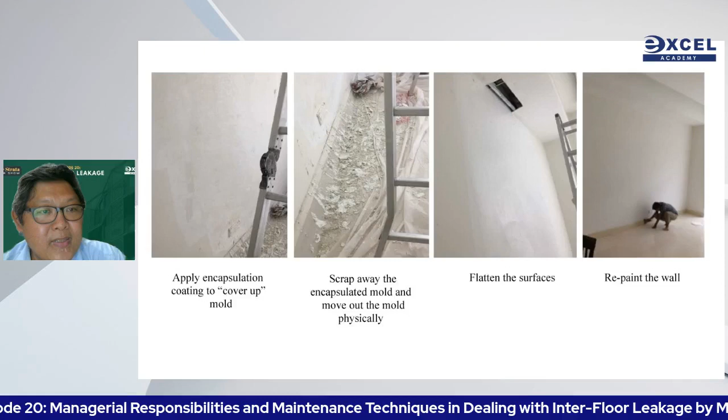Next slide. I actually use a paint to encapsulate the mold, scrape it off physically, repair and flatten the surface, and repaint the wall. And by this method, the ecology can be returned to original, with small quantities of mold and bacterial spores in the environment only. Next slide. Bear in mind, we do not need to live in a clean room. So we need to return the damp building to the natural ecology with small quantities of contaminant only.

So, in conclusion, water leakage is not a defect; it's a consequence of the defect. We need to address waterproofing. We need to address leaking. We can diagnose it with a lot of different methods, but all these scientific methods have their strengths and weaknesses. We need to know them to complement the use of all these methods. And durable, effective remediation addresses the root cause. Do not compromise with cosmetic repair because it will soon come back. And whatever the rectification or repair work, it must end with a proper sanitizing method. At least use Dettol to wipe the whole house if possible, including the ceiling.

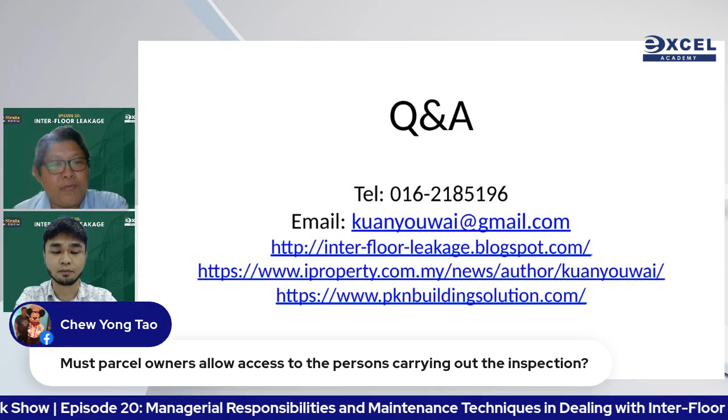So I do encounter cases where they are not allowed to enter for some assessment, but I'm there to help them to fill in the Form 28 to say that the water comes from this unit. Yeah. So there are some methods to do it. But as I said, you must know the pros and cons of each method so that you can complement them. The strong complement the weak. So to derive meaningful findings. Any other question?

All right, for the second question, we have a question from Miss Miza Dee, which is parcel owners do not own anything else besides their allotted unit and must depend on mutual cooperation to maintain the condition of the property. In the absence of such cooperation, what resources do parcel owners have to prevent deterioration or damage to their property?

Yeah, that's why the law is here. Without the law, it was even worse. Where any dispute must be, that's why the tribunal is here to help to resolve all this. And there's one part. At the end, we still need to communicate in a very conducive way and find a solution. Because technically, it can be done.

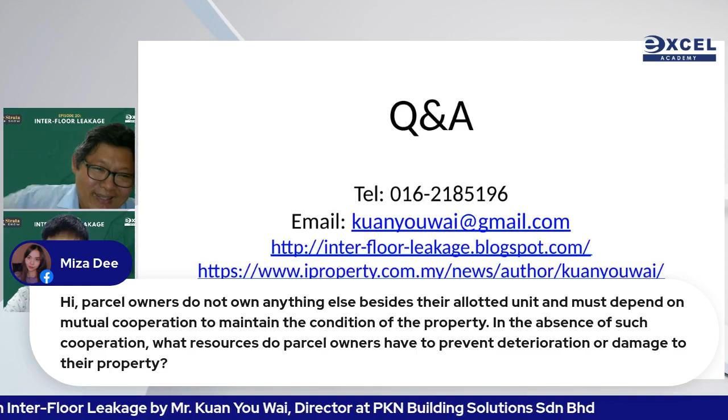But if the upstairs have some problem, I'm very good in solving human disputes. I like to study law because the law actually gives me what to ask, what is reasonable in this sort of situation, you know, how we should communicate with each other by showing proof, by getting help to cool down the atmosphere so that everyone can communicate. Living in the stratified building, everyone knows that your wall is my wall, my ceiling is your floor. Somehow one day I will also kena one. So I think communication is very important.

Okay, the next question is from Miss Kam, which is how if after the PM has done the inspection of interfloor leakage, the upstairs owner doesn't want to sign the Form 28, after that calls are also not answered, go to his unit also cannot find the owner. Then the owner says that he didn't receive the form from management.

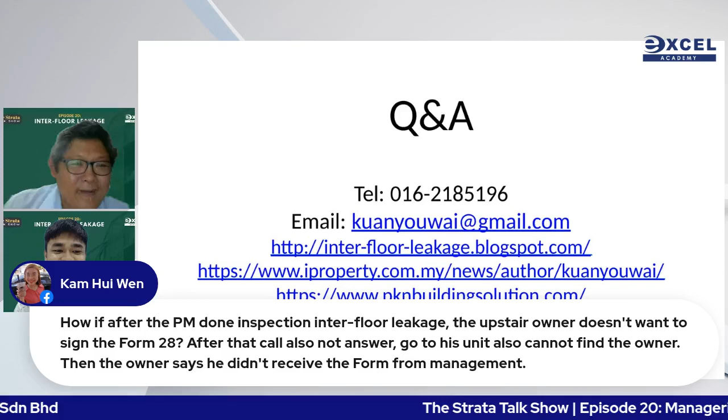Okay, Miss Kam. Firstly, Form 28 is not signed by the owner. Form 28 is signed by the property manager. Okay, so the owner just has to receive it. But the SOP of serving notice will come into place. If a situation is very urgent, that you can prove it is detrimental or it can endanger the building or the residents, forcible entry is allowed. But as I said, whenever forcible entry is allowed, get your committee, get your neighbor to join you. You see, because let's say if the people say I hilang 100,000, I hilang berapa ratus ribu, then now you see.

Secondly, if it's not so urgent, COB can come into the picture with the police to help you to escort in. So I did join some of the forcible entry operations, and after I got the entry, then I come up with the report. It still can be done. It's just a matter of the SOP that we need to comply with.